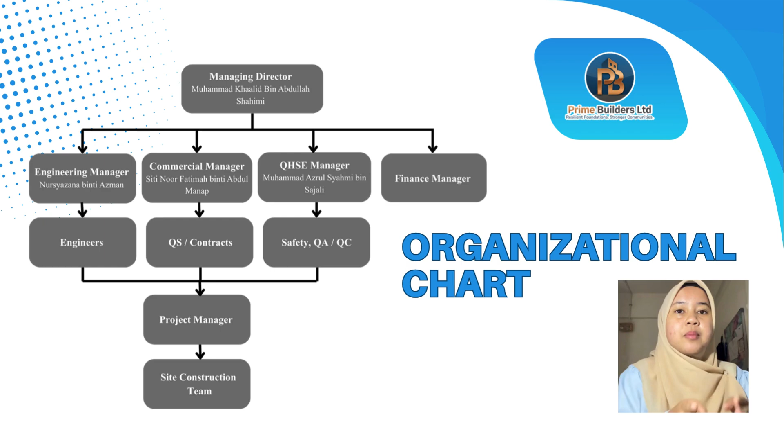So in order to help the Masjid Al-Fattah project to be completed safely, efficiently, with higher quality, let's move on to the project overview.

This project is Masjid Al-Fattah, located at Batu 3, Jalan Gambang, Kuantan, Pahang. The total site area is about 159,844 square feet, so it's quite a large scale development. The total project value is approximately 3.47 million and the construction duration is 1 year and 3 months.

Let's talk about the main objective of the project. First, we want to focus on the technical and engineering objective. The focus here is to ensure the mosque is designed and constructed with strong structural performance and proper engineering coordination.

Next is the flood mitigation and safety objective. We want to give special attention to the elevation and foundation, effective drainage, and overall site safety.

Lastly, the sustainability and environmental objective. This project aims to minimize environmental impact by using efficient site planning, durable materials, and environmentally responsible construction practice, ensuring that the mosque can serve for a long time.

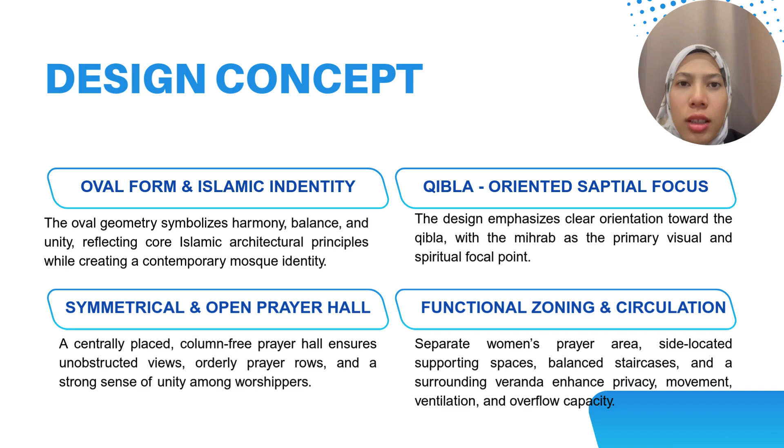For the summary of design and concept, the design combines Islamic principles with modern functionality to create a mosque that is spatially clear and welcoming for all users who come to the mosque.

Supporting spaces such as the imam room, administrative office, and multi-purpose room are positioned along the side. This arrangement allows easy access while ensuring that daily activities do not disturb the prayer area.

Moving to the upper floor, the women's prayer room is located on this floor to provide privacy and comfort. Although it is separate from the men's section, it maintains the same Qibla orientation, preserving unity in worship.

Surrounding the building is a veranda, which functions as a transitional space between indoor and outdoor areas. It also serves as an overflow prayer area and enhances natural ventilation, contributing to thermal comfort and openness within the mosque. The layout of Masjid Al-Fattah Batu 3 is designed to balance privacy, accessibility, and focus, ensuring that both worship and supporting activities can function efficiently and in harmony.

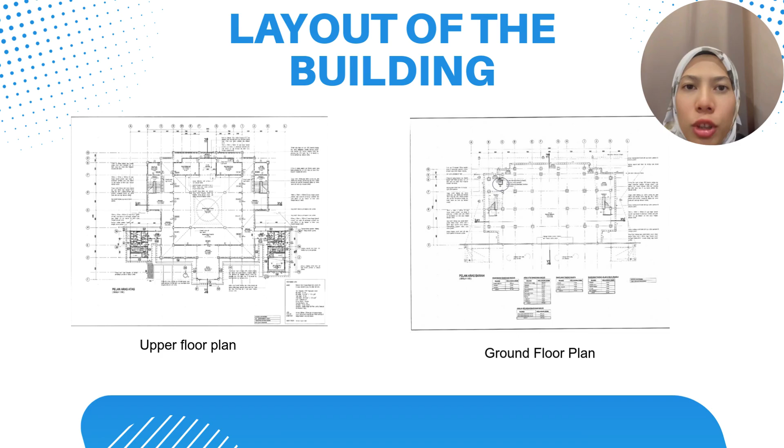Now we present the architecture overview of Masjid Al-Fattah Batu 3. The mosque is designed using a regular structural grid system, which can be clearly seen in the upper floor plan. This system allows structural load to be evenly distributed down to the lower level, ensuring stability and efficiency. As a result, the entire space remains spacious and calm, supporting a large prayer area with minimal structural interruption.

In line with Islamic architecture principles, the main prayer hall is positioned at the center of the layout. This central placement reinforces symmetry and balance, essential elements in mosque design that help create a sense of order and spiritual focus.

A key architectural feature is the central dome, indicated by the dotted circle in the middle of the prayer hall. The dome acts as a strong visual landmark and enhances the interior quality by allowing natural light to enter from above, creating a bright and more uplifting prayer environment.

The design also responds to the tropical climate through effective cross ventilation. Openings around the veranda and sides allow air to flow naturally through the building. This passive ventilation strategy improves thermal comfort inside the mosque while reducing reliance on mechanical cooling systems.

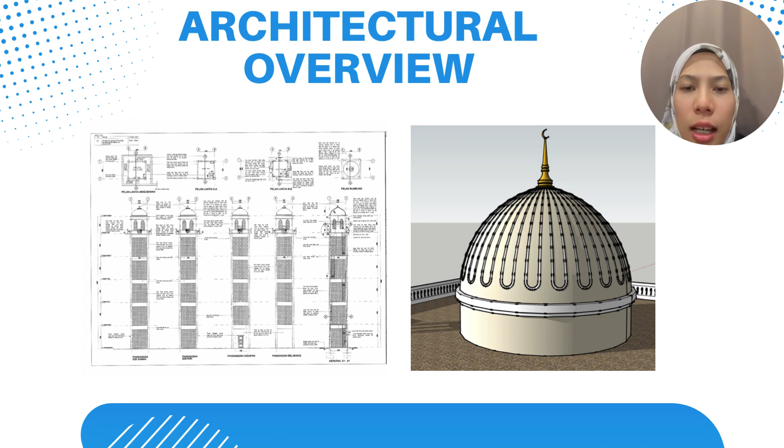Now for the summary of the architecture design of Masjid Al-Fattah Batu 3: it successfully combines structural innovation, Islamic design principles, and climate responsive strategies to create a comfortable and spiritually enriched space.

Now for the external concept, this mosque is designed not only as a place of worship but also as an important community space. The facade and landscape architecture work together to strengthen the mosque's role as a welcoming and inclusive environment. In front of the mosque, a public open space is provided to allow people to gather, socialize and participate in regular community activities.

This space supports events such as prayer, Hari Raya celebrations, and informal meetings, making the mosque a social focal point. The connection between the parking area and the main entrance is designed with a clear and user-friendly pedestrian route, ensuring safe, smooth and orderly movement for visitors of all ages.

For the landscape, soft elements such as shade trees, green areas and resting spots are introduced to create a calm and peaceful atmosphere. These features help reduce heat, improve comfort and enhance the spiritual experience. The landscape layout follows the mosque's oval form, creating a harmonious relationship between the building and its surroundings.

Overall, the external design reinforces the mosque's identity as a serene place of prayer with functionality as a welcoming community hub and a center for the community. Thank you, that's all for me.

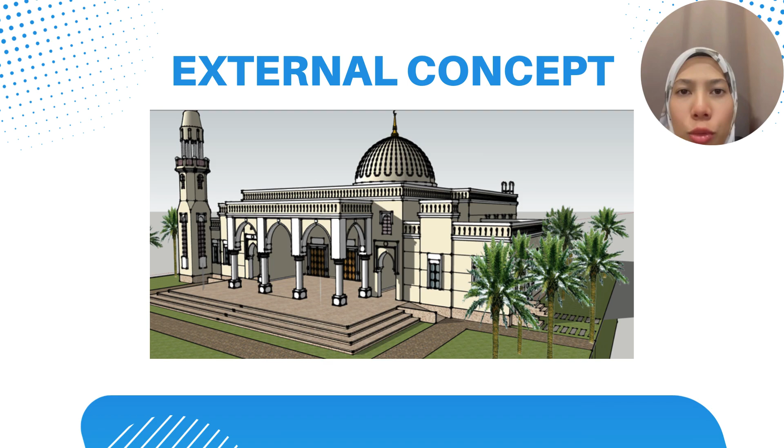Project schedule overview: this project is the Masjid Al-Fattah construction project, with a total duration of 281 days, starting on 19 January 2026 and completing on 12 March 2027. The schedule was prepared using MS Project, and the total project cost is 3.47 million.

On the work breakdown structure, or WBS, the project is organized into major phases including pre-construction, earthwork, substructure, superstructure, finishes, MEP works, external work and handover. This structure helps in planning, scheduling and cost control.

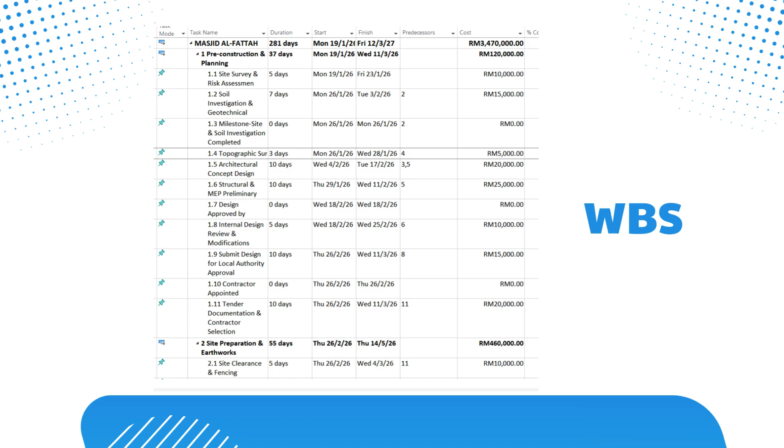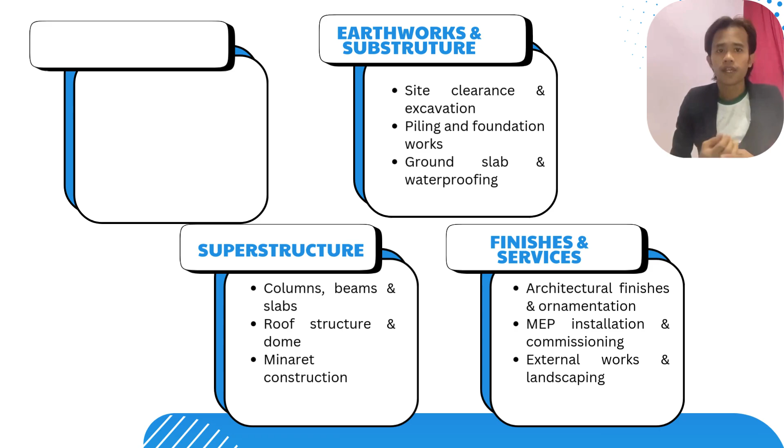Task breakdown: key activities include site investigation and design approval, followed by earthwork and foundation work. Then superstructure construction such as columns, slabs, roof, dome and minaret, and finally finishes, MEP installation and landscaping.

Project schedule and timeline: pre-construction is carried out in early 2026, followed by earthwork and foundation work. The superstructure is constructed in mid-2026, while finishes and MEP works continue until early 2027, ending with handover and completion.

Key milestones include design approval, completion of foundation work, completion of structural frame, MEP commissioning, and practical completion with CCC. On project cost, the RM 3.47 million is mainly allocated to superstructure, MEP work and finishes, with contingency included for risk management.

Hello and Assalamualaikum. My name is Muhammad Azrul Syahmi bin Sajali and I will be presenting about the cause and effect fishbone diagram for the Masjid Al-Fattah Batu 3 project delays.

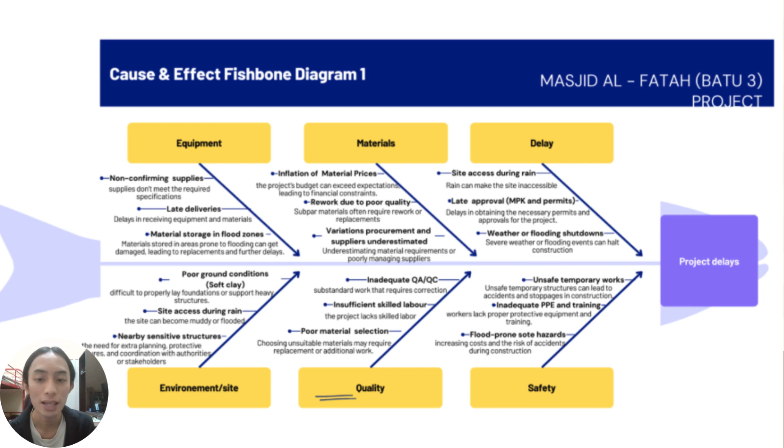For safety: unsafe temporary works, inadequate PPE and training, and flood prone site hazards. For quality: inadequate QA/QC, insufficient skilled labor, and poor material selection. For environment or site, there are 3: poor ground condition, soft clay, site access during rain, and sensitive structures.

Meanwhile, for the fishbone diagram cause and effect for fire explosion risk, there are 6 categories: human factor, material, delay, management procedures, environment, and processes. For human factors, there are lack of training, failure to follow safety protocols, and human error in handling flammable materials.

For materials, there is improper storage of inflammable materials, use of volatile chemicals, and damaged or leaking containers. For delay, there are faulty electrical wiring, poor maintenance of equipment, and overheating machinery.

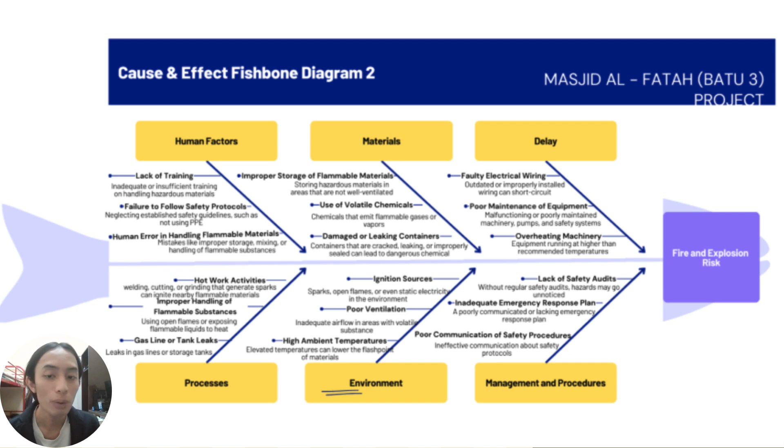For management and procedures, there are three: lack of safety audits, inadequate emergency response plan, and poor communication of safety procedures. For environment, there are ignition sources, poor ventilation, and high ambient temperatures. Lastly, for processes: hot work and activities, improper handling of inflammable substances, and tank leaks.

So, despite the cause and effect shown in the Ishikawa or fishbone diagram, these are the project mitigation strategies that we have to implement to mitigate the causes and problems.

So for the first one, the project delay solution: we have to create a well-structured project plan with clear timelines and realistic milestones, using project management software for detailed scheduling and tracking progress. Number three is to implement buffer times for unforeseen issues such as weather and material shortages. Number four is to ensure effective communication and coordination among all stakeholders.

Number five is to address labor shortages through outreach programs, competitive compensation, and cross-training. Number six is to strengthen relationships with reliable suppliers and manage inventory through just-in-time or JIT methods. Lastly, conduct regular risk assessments to identify potential obstacles and develop contingency plans.

For project mitigation strategies in terms of fire and explosion risk, the solution is to develop and enforce comprehensive safety plans for handling flammable materials and ignition sources. Number two is to train workers thoroughly on safety protocols and conduct regular safety drills. Number three is to use fire-resistant materials and install barriers around high-risk areas. Number four is to implement a preventive maintenance program for electrical systems and machinery.

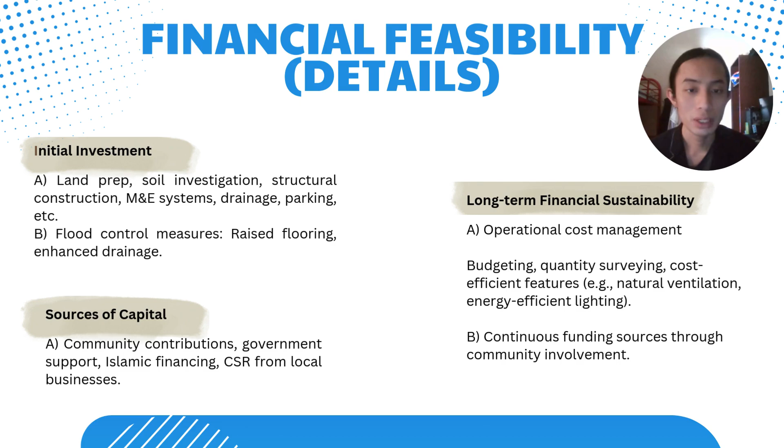For operational cost management, this covers budgeting, quantity surveying, and cost-efficient features such as natural ventilation and energy-efficient lighting. In terms of financial feasibility under return on investment and sustainability, there are three areas: direct financial returns, non-financial returns, and sustainability measures.

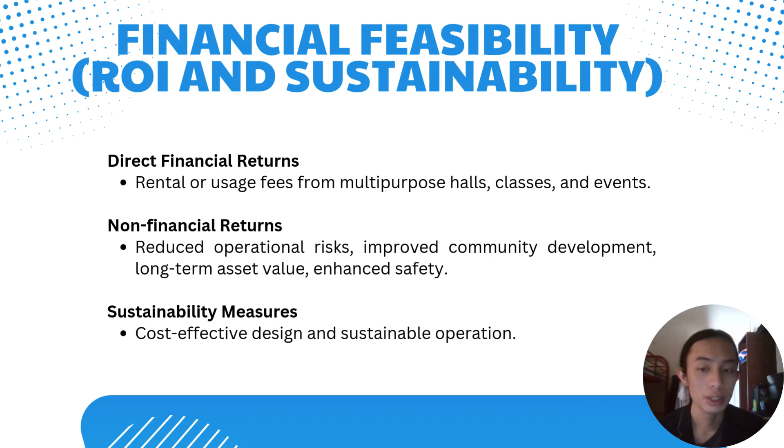For direct financial return, there are rental or usage fees for multipurpose halls, classes, and events. For the non-financial returns, these are reduced operational risk, improved community development, long-term asset value, and enhanced safety. For the sustainability measures, these are cost-effective design and sustainable operations.

For the technical feasibility, the objective is to evaluate the technical aspects of relocating the mosque. The key areas are site suitability and construction challenges, as well as facilities management and maintenance planning. These are the site suitability details.

As shown in the picture, the site location on 2019 show the location of Masjid Al-Fatah. The current site is vulnerable to floods, with ground level at 50 meters near the Kuantan River. The purpose of the new site is to elevate it above floodplains, with a ground level at 100 meters.

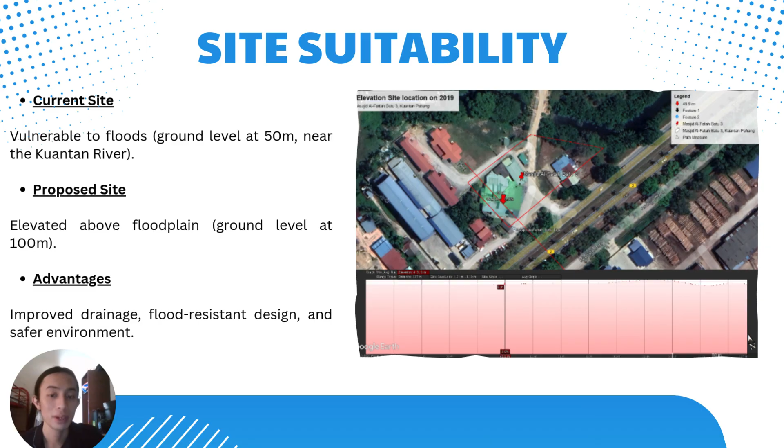The advantages of this are improved drainage, flood-resistant design, and a safer environment. As shown, there is an article journal presented inside the slide. For constructability, there is sufficient space for the mosque footprint, parking, and support facilities. Number two is a planned elevated platform and engineered drainage to prevent flooding.

Number two for constructability of this masjid is the geotechnical evaluation, which is appropriate for the site after necessary soil improvement and bearing capacity adjustment.

On the other hand, maintenance and operations have two areas: facilities management, which includes regular maintenance of structural, M&E, and drainage systems, and sustainability in design, for example rainwater harvesting, energy efficiency, and more.

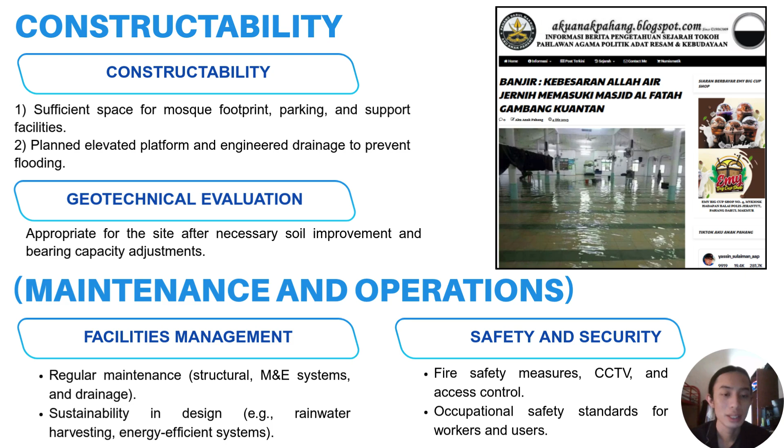And for safety and security, there are fire safety measures such as CCTV and access control, and lastly, occupational safety standards for workers and users.

In conclusion, the proposed construction of Masjid Al-Fatah at Batu 3, Kuantan provides a comprehensive and long-term solution to the mosque's ongoing water and flooding issues. The project incorporates an elevated structure system, flood-resistant architecture design, and efficient drainage planning to ensure the safety, durability, and continuous operation of the mosque.

From the project management perspective, the development is technically feasible, financially feasible, and well organized. Key risks such as construction delays, safety concerns, and operational challenges have been identified and effectively managed through structured planning and risk mitigation strategies. Additionally, sustainable design features and effective facility management help reduce long-term maintenance costs and minimize environmental impact. Overall, Masjid Al-Fatah Batu 3 is both technically sound and socially responsible.